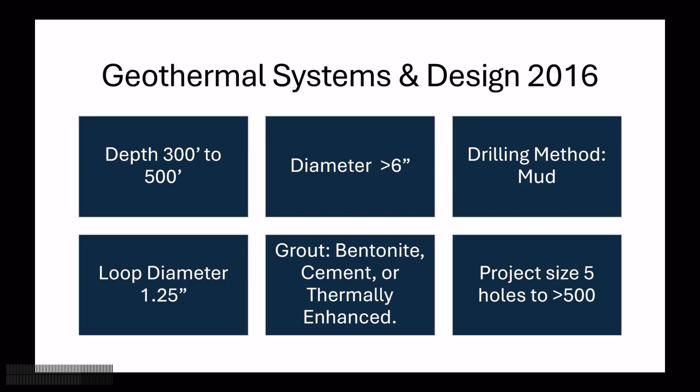Grouts: bentonite, cement, sand was our thermal enhancer over graphite. Kevin's father was the first one to field test a thermally enhanced single sack graphite grout back in 2008. Project size, 5 holes to 500 holes. Ball State was that first moment that we went, wait, we're gonna drill 3,600 holes in one location?

So today, we jumped 10 years ahead. We're working through the 500-foot rule and those regulations right now, but John Travacco said it best to me one time on a call. He goes, Brock, you're trying to have a field day where we're drilling like it's the 90s and you only want to go to 400 feet. We got to show these people how we get to 850 or how we get to 1,000.

And I agree, that is no longer a single day of drilling, where we used to see 400 and 500-foot holes, very easily drill 2 holes and have them looped and grouted in the same day. George Lucas Narrative Arts Museum, we did 3 holes a day to 500 feet, 710 holes under the substructure of the museum. Today, we see diameters from 6-inch to 8.5.

We have the professionals with Darcy here, and we have dynamic closed loop that are 12 and 14-inch wells. We get into all sorts of different specialty drilling methods. We heard about coil rigs today. We're going to hear from Colt about advances in technology. We have foundation, we have legacy, water well, and geothermal up here.

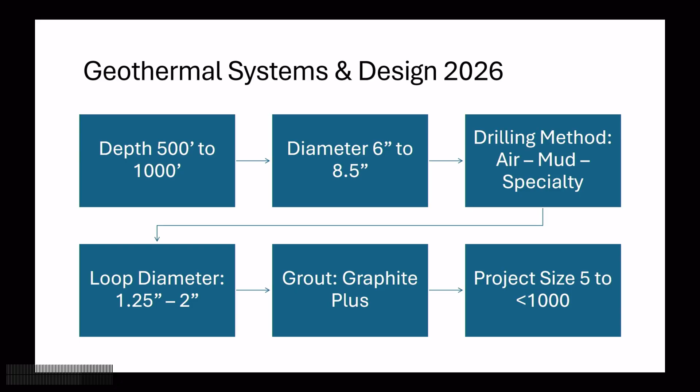Loop diameters, 1.25 to 2-inch. Grouts all over the place, from graphite to nanotech to cement to low carbon. Type 1 Portland is not the same as what Type 1 Portland once was. We have many things changing in our dynamics. Project size, what does Princeton want to do, like 8,600 holes total? You look at what we're getting into everywhere.

So we think about this. When we're going into Geothermal 101 and Drilling 101, what's it going to be about? Location, right? Should there be a Starbucks here? I said that earlier. Project feasibility, budget, stakes, the state and local regulations, test hole logs and data.

And Josh and I were just lamenting at the end of the last panel about we're doing this geothermal revolution and we're drilling these holes all across the country. And it's the greatest data set that we could possibly have for advancing what we want to know about thermal energy resources. And it's the Wild West when it comes to how things are logged, how things are maintained, that's back to that tribal self-taught knowledge, from stocking caps to cowboy hats, how we're drilling this stuff. We have to consider it.

Construction timeline. I don't know how many projects I get pulled into, as the Geothermal Drillers Association, where they go, cool, we have 65 holes to 850, 65 days, right, Brock? And I'll tell you, the biggest significance right now as we get into these things is weather.

From Mayor Wu shutting down projects two Mays ago because it was too hot to work, to significant rain events, to tornadoes. So, as we look at our Gantt chart and we have project timelines and liquidated damages, it is significant to consider how our weather patterns have changed and how significantly that changes our ability to execute on time.

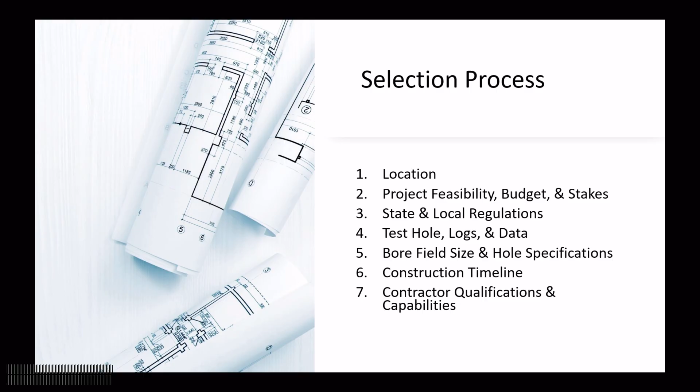And then contractor qualifications and capabilities. As we heard in the first panel, and we'll hear here today, they have the right tool for their region, or when they come to this, they have a means and method that they want to execute with that will give them the best chance of mitigating risk and getting us to bottom at the best rate possible.

So as we look at a drilling company's selection process, it comes back to equipment availability. We're talking coiled tubing today. There's a dozen coiled tubing rigs in the geothermal space right now. Conventional mud rotary rigs that are from the mid-2000s and older, there's plenty of them out there. So as we look at track mounted and we look at European methods, we have to consider the best tool may be the most readily available to get us into that space and getting going.

Again, location history, data, geology, test logs, test holes. From a selection process, all three of these guys right here would say customer and engineer are 100% one of my drivers in whether I'm going to bid this project or not. Right, Kevin? Yeah. Hole specifications.

As we look at doing 1.5-inch loops, and we go, well, we want to save money on grout, so we're going to go to a 5 5/8 hole or smaller. We have to consider at 850 the size of tremie that's going in with that loop to be able to pump that grout effectively. That tremie has to be on the bottom of the hole to positively displace up. And so if we're going to go to bigger loops and bigger tremie, deeper depths, we have to be able to have a size borehole that can fit all of that and effectively grout it and seal it.

Because we think of that grout as thermal enhancement and the lifeblood of that system, but it is also what is protecting our groundwater and our subsurface, and it has to meet permeability standards and has to be able to stand up to the geology and the subsurface chemistry there, and we'll get into that today.

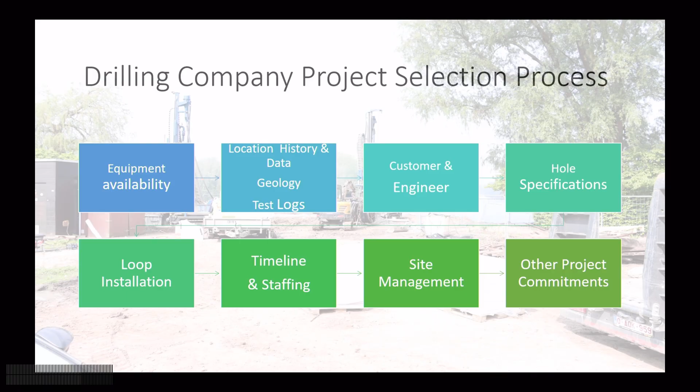Loop installation, timeline, and staffing. We talk about, well, we want to get to 3 individual rig crews, or 4. I'll tell you what, if you're drilling an 850-foot hole, it takes 4 individuals. You have one that is running a Bobcat or a skid steer moving those cubic feet of material that's coming out of the hole nonstop to have site management. And that gets to site management and then other project commitments.

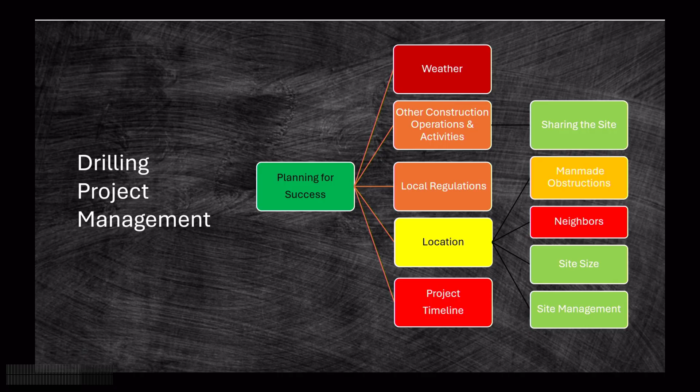So this is what it looks like for drilling project management. What is success? Weather, other construction operations on site, local regs, location, project timeline. And that drives right into, how do I work in this area? What man-made obstructions? What are my neighbors' requirements? Hours of operation, site size, site management. When I'm thinking of drilling project management, that's when I get into what's going to impact my success. The ones in green, we can plan for and execute. The ones in orange are the problematic areas that we really need to start thinking about.

And that comes back to what subsurface utilities are there? What was there? This is a great green space, but how is it impacting us? To industrial pollution, from PFAS to GenX chemicals, and how that's impacting us. We have formation hydraulics, meaning how much pressure can I exert on that borehole before I start eroding it? Cool, we decided we were going to drill a 5.5-inch hole, but I'm now trying to drill it at a rate of several hundred feet an hour. What pressures am I putting there, eroding that hole out bigger?

To water, high volume zones of water, wellhead protection areas, and then artesian flow, methane, H2S, other volatile gases. As we go into urban markets and everything else, this is a significant piece that we have to be prepared to deal with, but also we have to have the right contractors that are qualified to do it safely. There's a Variety article from 15 years ago that says they're drilling geothermal next to my house and I want to blow my head off.

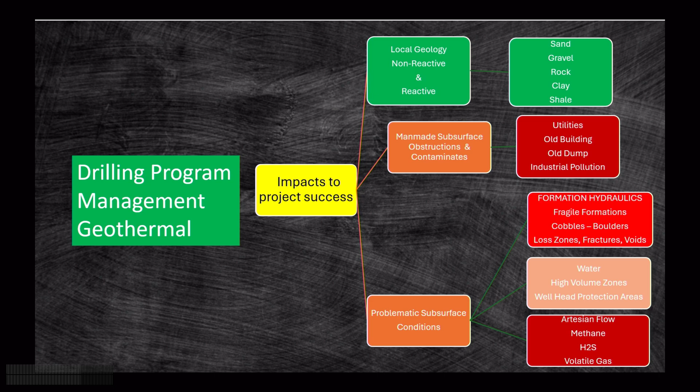Like, that's still out there. When we Google geothermal, that comes up. Also, Jack, I don't know how old Jack was at the time, but I'm just going to say Jack was quoted in it.

Last slide, and I'm going to jump to these guys. Borehole creation. This is what the basics look like. I'm exerting force. I'm creating a cutting. That cutting has to be somewhere between a 1/2 inch and 1 inch. I like to think of nickels and quarters. That's what needs to effectively come out of the hole so I can manage that site.

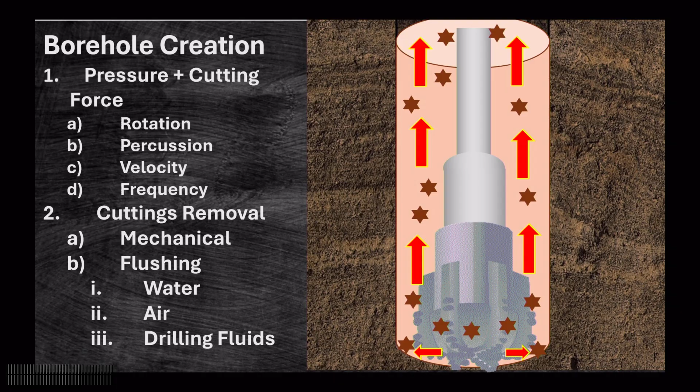Next thing, how am I rotating? What is my force, what is my velocity, and there's drilling rates and speed that are going to determine the equipment we use to bring those solids out of the hole. And then it's all about cutting removal and solids management. Soren talked about that, but this is the significant drilling 101. If I can get those right, I can do it. And this is what I need out of my Mother Nature aspect to what does my qualified contractor look like.

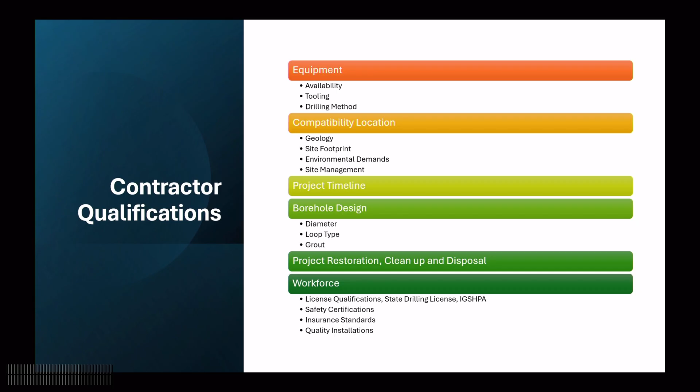And now I want to jump out of these and get to Kevin's up first. I'll leave us right here. Lessons learned. We have to safely complete these projects. We have to understand what tooling and equipment is available, because as a classically trained Baroid and Halliburton guy, yeah, I can tech this to a level that we could have $2 to $3 million worth of equipment on site. Is that cost effective? Or is mud rotary and that rig that the local driller has that has been successful in that area, is that the right tool?

So as we look at all of these pieces, we have to understand, for us to get to the scale we want to in wide scale acceptance, we have to be able to use all the tools and empower all the qualified drillers we possibly can. Kevin, you're up.

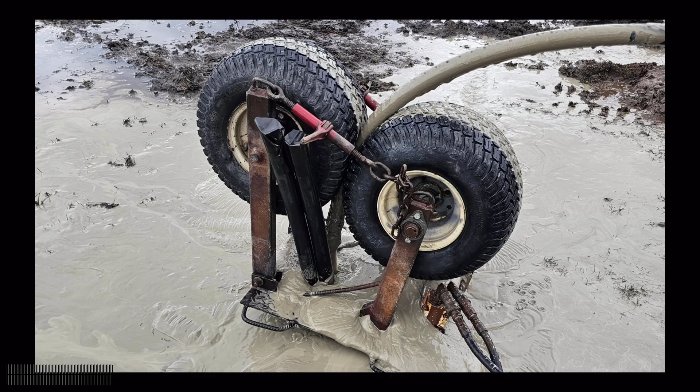So, of course, we do these things last minute, and I'm not always great with slides, but we did have some fun videos that I wanted to get out there to show some of the joys that we see in the geothermal world. Just a minute ago, Brock was talking about tools and selection and qualifications, and when we had a pre-meeting last week, I showed these guys what I consider to be the most valuable tool in the industry, and I don't care which aspect you're talking about. It's right there. It's meetings like this.

It's the expansion of our network, talking to engineers, talking to geologists, talking to building owners, talking to people in different parts of the country. Somebody has done it in a location before. So being able to pick up a phone, call, have a question, figure out what the risks are, what they've seen, what the correct methodology of designing a bore field is, is as simple as a phone call away.

And that is one thing that the industry has really evolved over the last 10 or so years, between just in New York State with NY-GEO and the Empire State Water Well Drillers Association. They work really closely together. We do have to protect our most valuable resource, which is our groundwater. We also have to continue to try to improve this state's and the country's energy usage.

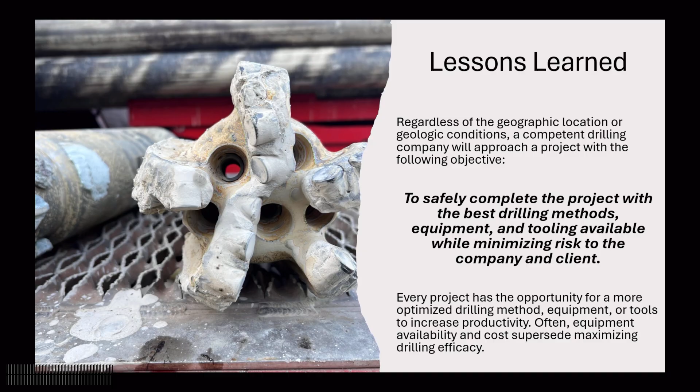Thanks, Kevin. Who's up next? I think it's Mike Fleming. Sorry. You would have thought that I would have done that with my... So I just press enter? Arrow? Space bar. Next space bar. Don't hit it with a pipe wrench. So, no pipe wrenches anywhere?

As we approached this industry, it was the machinery that we use, pictured up here, micropile rigs. They're not designed for drilling geothermal holes. They do the exact same thing. They spin, they go round and round and push things down in the ground. It was kind of a mode of run what you brung. That was what we had available to us. We wanted to get into this market and use what we had.

As far as drilling techniques go, using this equipment, the advantage that has been afforded to us is the fact that these machines specifically have very high-powered heads and retraction systems on them that make them capable of 50, 60, 70,000 foot-pounds of torque. And that's what allows us to very efficiently install casing where subsurface competent rock is 150, 200, 250 plus feet below ground surface.

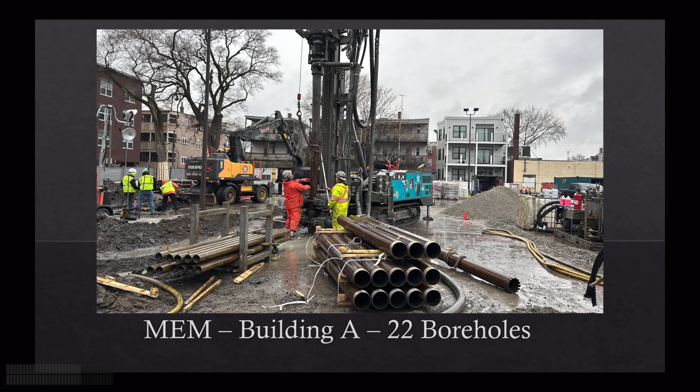So that's how we have adapted Phoenix's systems that they already had in the foundation industry to the geothermal industry. It's worked well for us so far, but myself and my colleagues, we've been very vigilant where we attend these types of conferences, go and see other pieces of equipment around the world, around the country. It allows us to look and see where other companies are going, companies like Republic, companies like Hammer and Steel, what they're offering, and how we can use different systems on site in order to expedite our production.

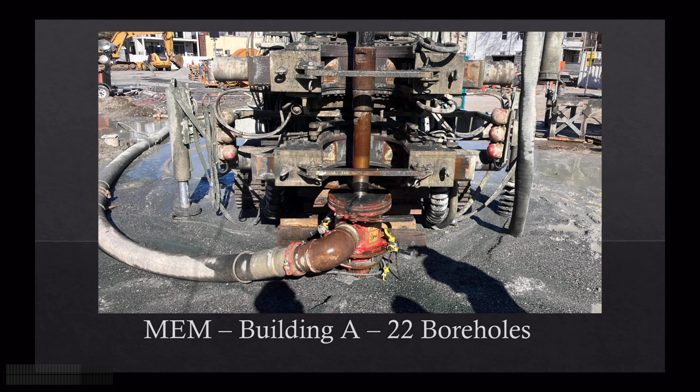There's a few more pictures of that site. But for us and for any drilling contractor, it's about adapting. Whatever you have, whatever Swiss Army knife you may hold, it's getting it to the site and getting the job done. So this is the approach that we've taken to do that. Thanks. That's about it.

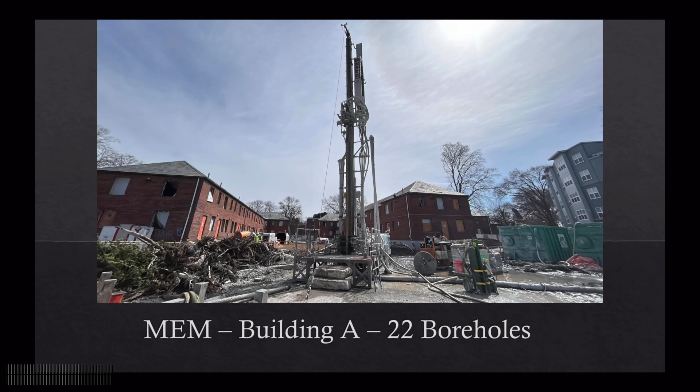Hey, that's me. Hey, Colt McCarthy, CEO of Republic Drill Co. Come from a family drilling business. My dad, late father, started a company in 1977, Venture Drilling Incorporated, and we did water wells, geothermal, and aggregate mining, drilling and blasting. And so I got the privilege of growing up in this industry, and I've had the privilege of working in it professionally for 20 years.

And one of the more, I think, fun seasons has been this season getting involved with the geothermal community. Because for the most part, we've been selling the same rigs to do the same things to the same people in the same areas year over year. And while that works, there's not a lot of innovation in that space. And this industry has pushed my boundaries because it's made me question what we're doing, how we're doing it, and then where can we find the next tool that can do it better?

Because solving for pain points makes all industries better, and we haven't had a lot of solutions poured into this industry for a long time. We've had a lot of people that do it the way they've been doing it, and it's gotten by, but now we have a lot more pressures and constraints, risks for not getting it done appropriately.

And we're talking about the urban drill sites and very large projects with penalties for time delays, penalties for poor performance. And so people have to invest in different technologies to make sure that the job can get done the way it's supposed to. And it's challenging, like they said at the panel before us. Most people in this industry really appreciate challenges, and that's what drives us to keep moving forward.

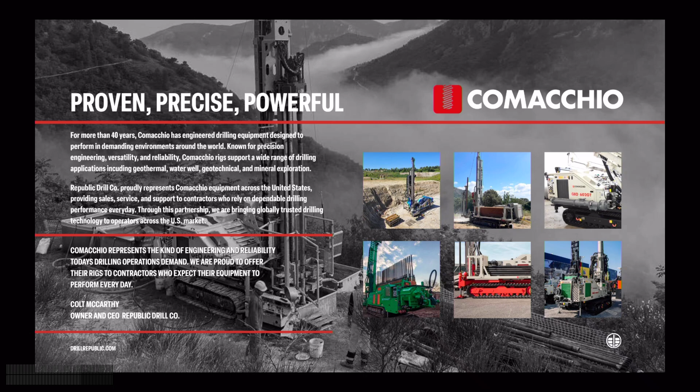and in how their rigs work. And so you end up with these rigs that when we look at them, we say, wow, these are all great new innovations. And the reality is they probably didn't think that up themselves. They solved somebody else's problem somewhere else in the world, and that became something that we can all appreciate and use. And so more tools in the toolbox is really what we're bringing with these brands, from dual rotary rigs to tiny rigs that go inside buildings to really big rigs that have a lot of power. That's one of the ways that we're helping bring different innovative solutions into the industry.

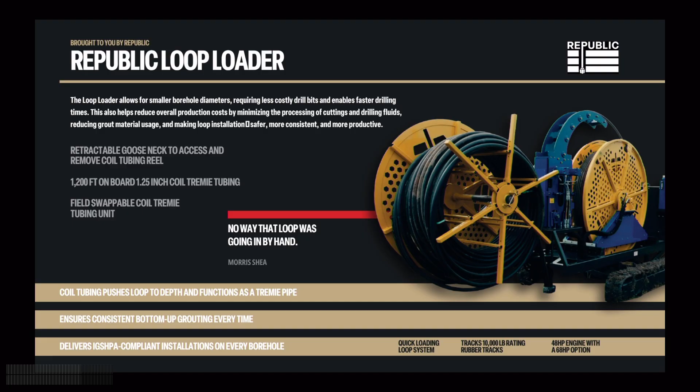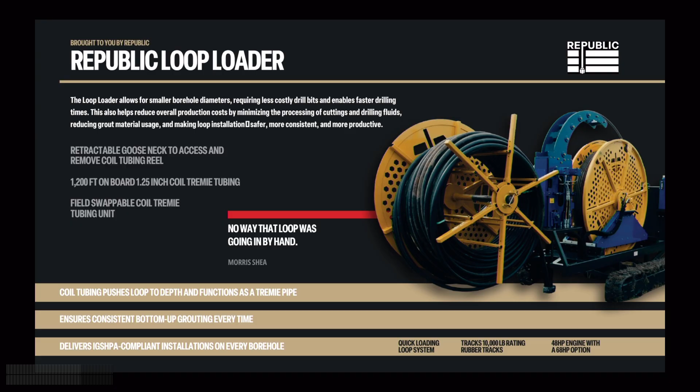The thing that is most new to us and new-ish to the industry is a product that we came out with and helped continue to develop called the loop loader. And if you've been paying attention the last couple of days, getting loops in the ground and getting them grouted is the heart of the geothermal system. And sometimes it's very challenging to do that. Even if the hole is drilled right, it can be very, very challenging.

And the loop loader takes the geothermal loop and it goes on the front of the machine, and then it uses a coiled tubing injector head and coiled tubing system to drive the loop down into the borehole. Because loops are malleable pieces of plastic essentially. And so the longer and the more you push on them, it's like pushing a piece of spaghetti through a straw. It doesn't work good when you push on them.

So we apply all the force at the bottom of the loop, and it really helps drive the loop down. And we can put about 2,000 pounds of force at the bottom of the loop as we're pushing it down. And then once we get the loop in, we can use our coil tubing pipe that pushed the loop in. It becomes our tremie pipe now, and we grout through that pipe. And so one of the standards of IGSHPA in setting loops is that you grout from the bottom of the hole every time.

That way we ensure there's no air pockets, there's not water, there's no voids, and the borehole is sealed off appropriately, and the thermal conductivity that we're expecting from that specific loop is extracted from the hole. And so this machine, it's only been available to purchase for about a year, and hopefully we'll see it more widely adopted as it solves more challenges.